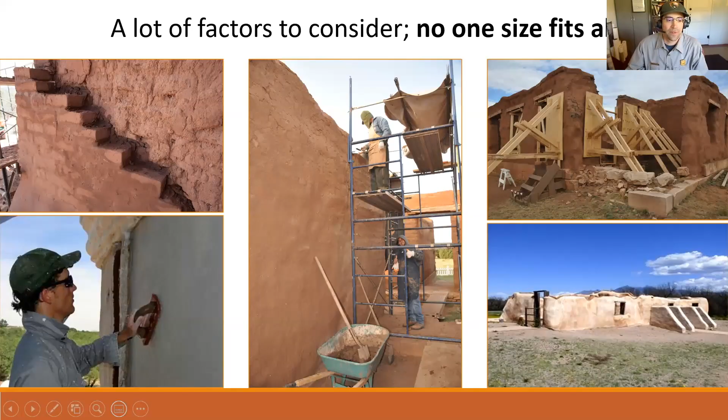However, there's a large range of things that must be considered when thinking about how to choose treatments. Oftentimes, these factors relate to site history and significance. So again, we want to make sure that treatments that are planned or executed are in keeping with the history and significance of the site and still allow us to tell the story.

We also have to consider National Historic Preservation Act and compliance with Section 106 and National Register character defining features. Often this requires SHPO consultation. Whenever planning a treatment, you really need to be in contact with the State Historic Preservation Office if you're considering treatments on eligible sites that are eligible for the National Register or are already listed. Consultation with SHPO can really be an effective way to develop treatments that are sensitive to the resource and consider character defining features. Integrity is an important concept to consider when planning for treatments.

These include materials, workmanship, feel, and setting. Interpretive goals and parks or resources, fundamental resources and values, or a site's fundamental resources and values are important things to consider as well. Oftentimes, many of the treatment decisions that are made have to do with interpretive goals and the way the site is meant to be presented to the public or to visitors in order to tell a story that's fundamental to that site or that park or resource.

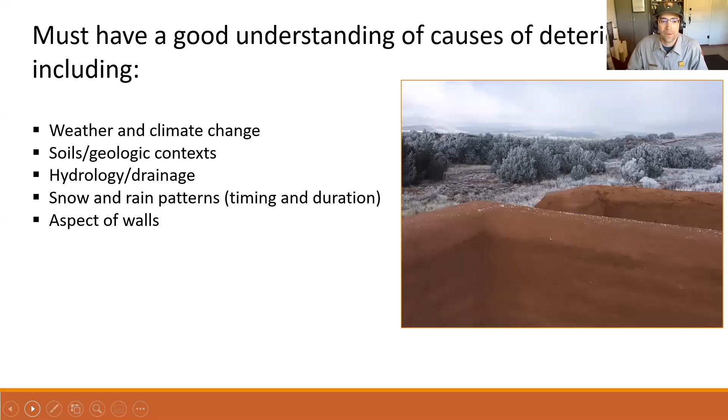Local soils and geologic contexts need to be understood for how erosion may affect a site and drainage patterns. Local hydrology, how close is bedrock, and how water drains from or approaches the site are important considerations, along with snow and rain patterns and aspects of walls. It's pretty common to look at the north side or north walls, and east walls often get more impact from moisture. Moisture is really the number one cause of deterioration of earthen architecture. So much of what we'll be talking about today, and in the case studies presented, has to do with dealing with the effects of improper drainage and impacts from moisture intrusion and the instability it may cause.

Preservation documentation needs to be considered whenever planning treatments. At a minimum, before, during, and after photos need to be taken to document the treatments. Documentation is really important if we're going to learn from our past failures and learn the successes of our treatments, and show them to others.

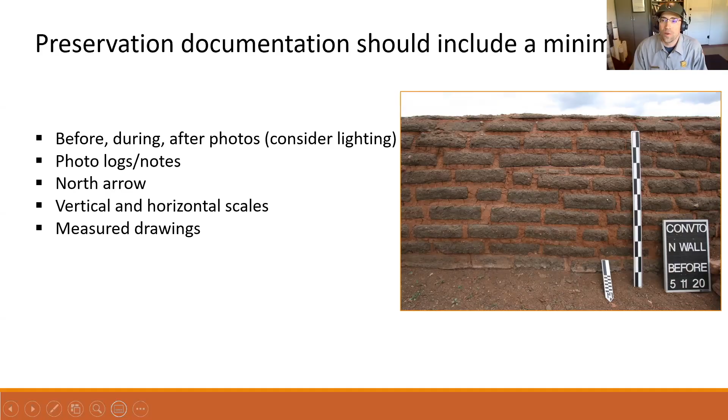Lighting needs to be considered during photos, so you often need to go out when the light's even, and a little cloudy is usually the best time. North-facing walls will be more difficult to photograph. Photo logs, notes, north arrows, vertical and horizontal scales, and measured drawings are crucial.

Next, I'm going to show you one method of how Pecos National Historical Park protects original 17th and 18th century adobe walls. As I said, many parks and sites use different methods, and although they follow the basic principles we went over, some of that is based on the history of treatments on the site. At Pecos, the use of brick veneers to protect original walls, and to protect and provide the form and outline of deteriorated Spanish colonial walls of the church and convento, started in 1915.

Since then, we've been honing that technique. Now I'm going to show you a series of photos, including an animation at the end, that shows how we do this method or technique.

Here we're seeing the way we do it at Pecos: we encapsulate the original material, the original adobe wall remnants, in a new brick veneer. We make the bricks on site, so it is a form of encapsulation or shelter coating, but in this case we're using actual adobe bricks. We don't plaster over the bricks typically, and that's related to the interpretive values that seeing adobe brick gives you. This was a decision that goes back quite a ways, and we really want the public to come away with an understanding of the construction of the site.

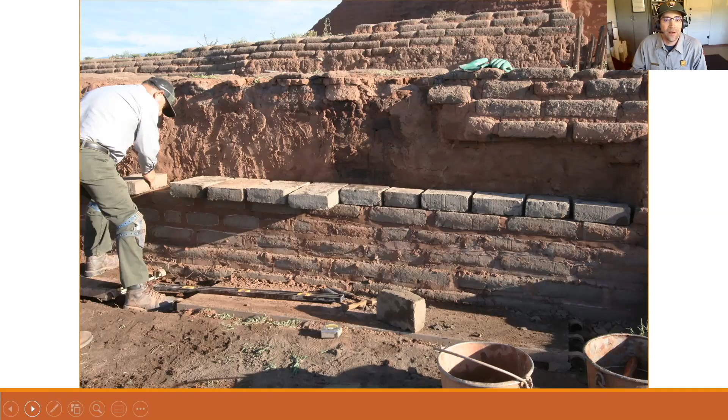Then we build the new veneer from the base up with bricks we make on site. Here's Mason Jerry Garza laying the bricks against the original. We're doing one side at a time, so just one side of the veneer, while the original is protected behind the unamended shelter coat. Once we build the veneer all the way up, we also work on the cap.

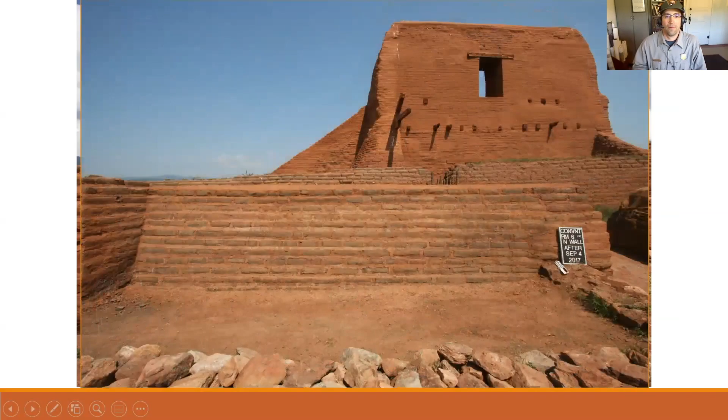Here's an animation to show before and after. Magic.

I hope you got an idea today of the basic principles and factors to consider when planning any treatments or preservation work on earthen architecture. I hope we've made the selection of those factors a little clearer, and I hope you'll be able to come visit us at Pecos National Historical Park someday. It's a pleasure being with you today. Thank you.

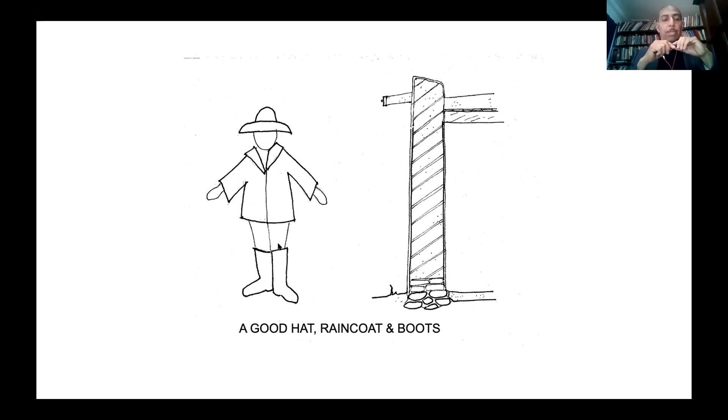It is important to note the variety of protections needed for building walls and other elements, such as what this sketch shows: a good hat, raincoat, and good high boots. This does not mean we will make everything impervious, but instead whatever we select as materials will be compatible and sacrificial before the substrate material is affected. Maintenance is part of the nature of these earthen buildings, and you will continue to hear that today and in the following weeks.

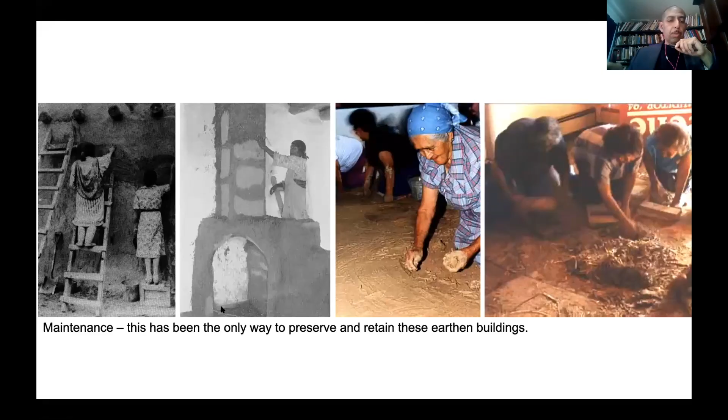Another intangible aspect of the annual care and cyclical maintenance of these buildings takes place in the Hispano village communities. These series of photos show a living tradition that we are in danger of losing. A key component to these buildings are the mayordomos.

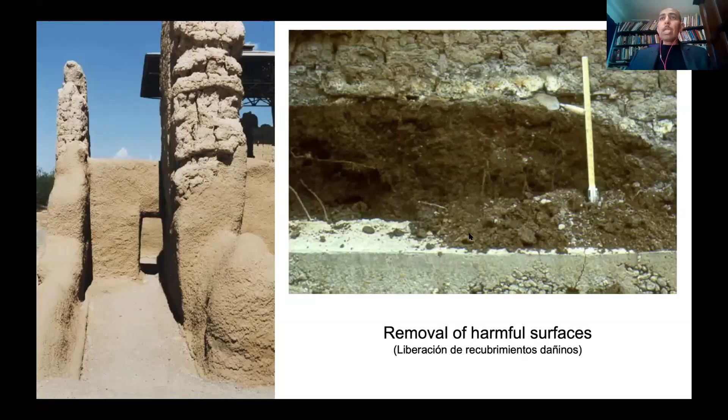You can see the art conservators repairing or injecting mixtures of clay with a bit of lime, in some cases to reintegrate earth reliefs or pieces of decorated or polychromatic surfaces.

The rajueleo system uses small pieces of volcanic or lava rock, broken ceramics, lighter stones, and other available materials for chinking the mortar joints in stone masonry as well as adobe walls. It might not be easy to do in an earth mortar masonry structure in our region, but it could be tried or modified to fit our needs here.

What about our shoring needs? When it comes to fragile and failing walls, it's vastly important to shore up walls or structures if they're close to collapse, or if visitors are getting too close to them. The shoring system should be architecturally and aesthetically pleasing, fitting into the context of the site, landscape, and the materiality of the structure or building.

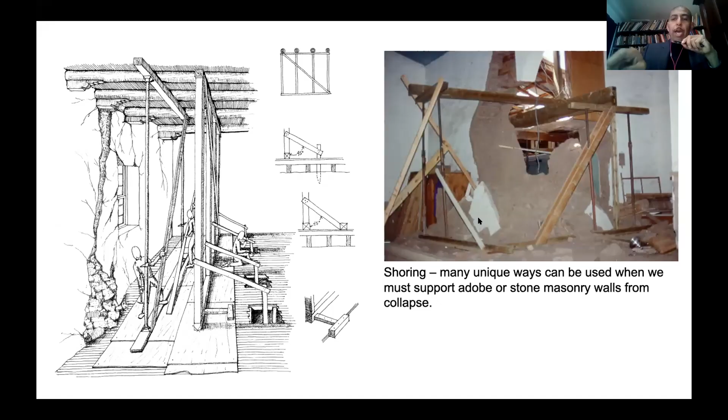The other slide shows the Oratorio Jesús Nazareno in the community of La Jara, where a lack of good drainage caused these walls to fail. The walls were constructed in a very unique encofrado manner, or boxed-in walls, which they call paredes de cajón.

Mud and rocks are laid in wood forms similar to rammed earth, then the formwork is removed. The only way to repair this building was to extend a temporary beam from the interior to the exterior, in order to allow us to work around the structure and near the wall.

The next seven slides will depict the effects of adding concrete against a wall, and the careful removal and repair of the base of the walls. We start with a quick diagram showing what to expect in a wall when carefully removing a concrete apron.

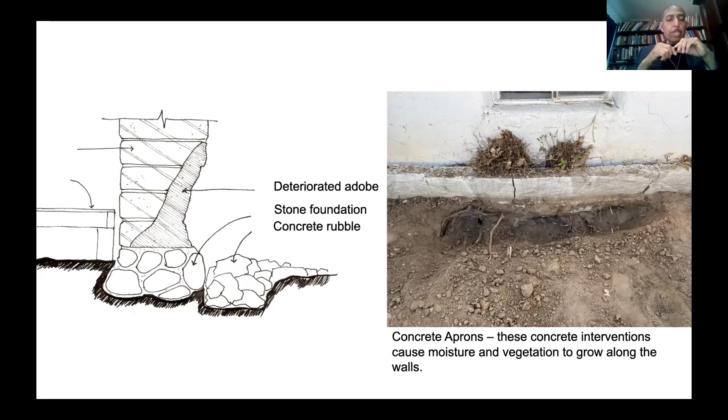In some cases, like the slide shows, vegetation growing between the concrete apron and the wall can also be an issue. This photo was taken a few days ago in a small adobe structure in the village of Los Lunas.

The following slide shows a temporary shoring system composed of plywood, through-bolted and supported with diagonal wood members to prevent kickback. This photo was taken at the historic Gutierrez Hubbell House in Albuquerque.

It's a long story, but we had to work quite fast since someone had kicked in the lower part of the wall. The good thing with this wall is that we had previously shored it, so it didn't collapse on us.

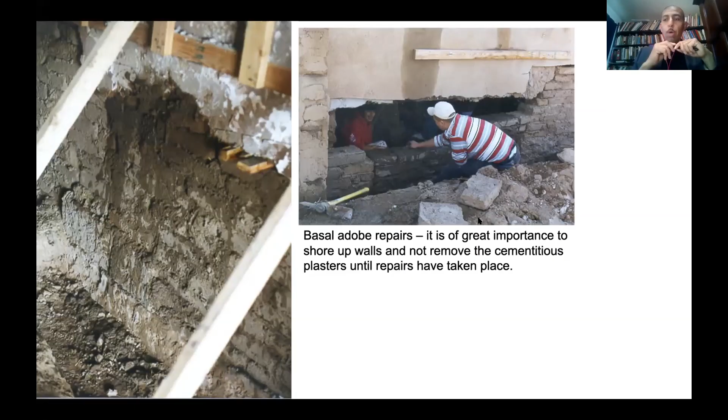These two images of the Arroyo Hondo Church show the insertion of adobes along the base after a very large concrete apron with rebar had been carefully removed.

While working with Cornerstones Community Partnerships, we were recommended a product called Bristar back in the day, but now you can find it under the name Betonamit. You create holes in the concrete, then pour this miracle material, and it slowly breaks and cracks the concrete into smaller pieces. Please do not use pneumatic tools against these fragile walls.

It is key to make a good connection with unamended adobes in order to have good adhesion to the wall. Once again, you see a slide of Arroyo Hondo to the right and a slide of the church in the town of Bernalillo, which we discussed earlier in the shoring part.

I will not get into how to do this, but there are times that if a certain percentage of wall is deteriorated, you then take certain actions. In some cases, you might need to have new adobes keyed into the original wall, but in some cases, the use of mud plastering layers with light stones or other light material could work just as well.

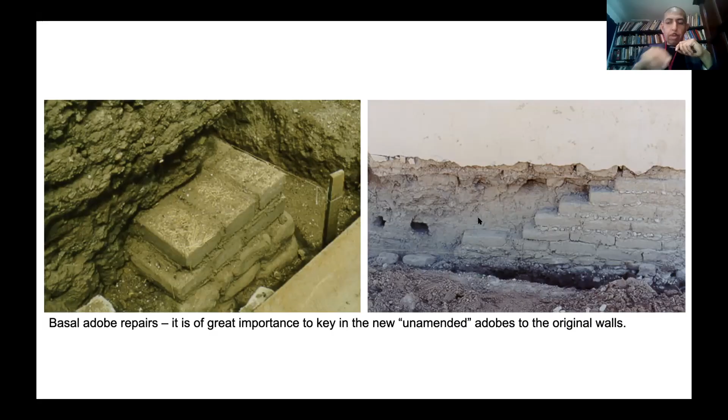This next slide, which took place at the Gutierrez Hubbell House in Albuquerque, shows this young man laying adobes and allowing them to dry before hard packing the top of the new adobes with the original wall using dry mud. This is done to prevent shrinkage and separation of new adobes from the original wall, making this a more monolithic wall.

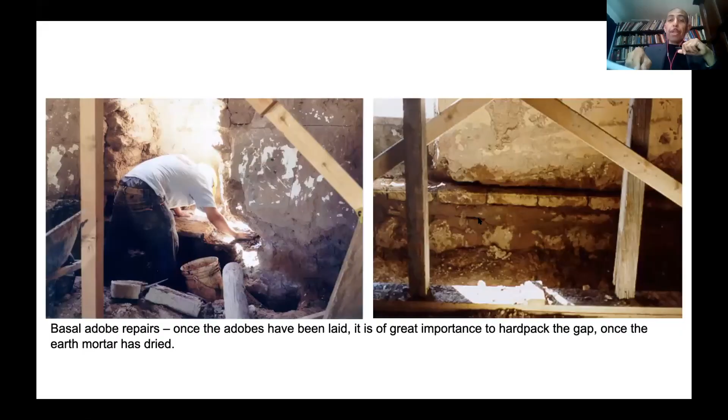The next two slides show through sketches what a wall should look like when repairing the base with new unamended adobes. Remember, it is important not to remove the cementitious plaster, especially since in most cases these plasters can become a structural diaphragm, and its removal should only take place at intervals a few feet apart.

This allows the walls to dry, and like I mentioned before, it retains the rest of the adobe wall in place. Notice the keys, which are important when working on specific areas of the wall. These eventually will serve to connect all the repairs and make it into a continuous adobe coursing at the base of the wall.

The last slide shows how it should look after the repairs have taken place along the walls. Observe how well crafted Pat Taylor and his crew repaired this wall at the Socorro Mission in the city of Socorro near El Paso, Texas.

And a quick sectional diagram showing you how to key in the adobes while working on the basal repairs.

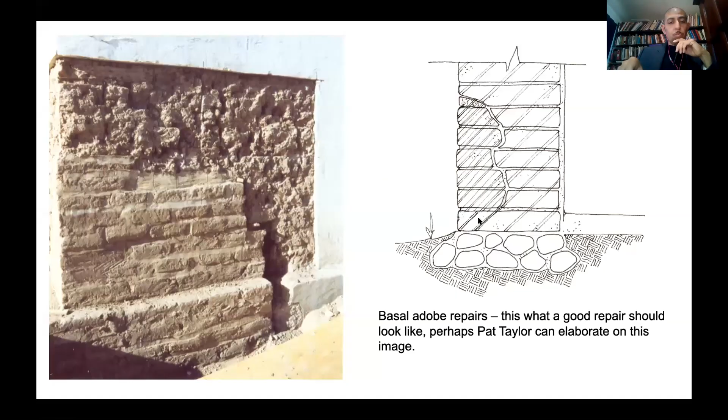Many of these adobe repairs are tedious, such as this example at the Gutierrez Hubbell House site where we worked with a local group of young men. The slide is depicting the lack of good connection at the corner of this building, the Casa Hubbell.

It was not structurally failing, so we decided to stitch the walls with adobe in situ, or adobes that were actually made in situ. In this case, we carefully removed the half piece adobes in order to insert a full one. We jumped from the lower area of the wall to the top and so on until we were able to complete all repairs. Notice the similar shoring that you saw in the previous slides in the same house.

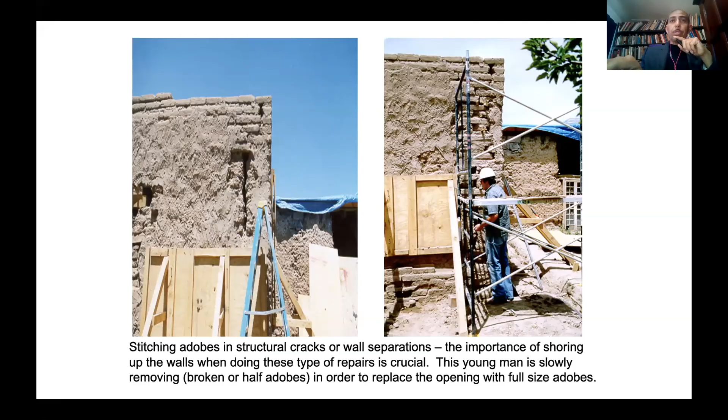Let's quickly touch on mud plastering. There are different ways of applying mud plasters onto the adobe or stone masonry walls when plastering a wall or site. I prefer to throw the first coat onto the masonry or earth walls. It is not commonly used in the States, but it's a common practice with our neighbors to the south.

The albañiles, or masons, have been doing this for centuries, and it is common to apply the coats of plaster in this fashion, especially since they typically don't use wire lath for their contemporary construction practices. It takes time and practice, but it can easily be mastered, and can move along quite fast once you get used to it.

It is sometimes difficult to find good soils used in some of these sites, especially when the parks do not allow it.

Let's quickly touch on mud plastering. There are different ways of applying mud plasters onto masonry walls, but I've already gone through that.

It is sometimes difficult to find similar soil used on some of these sites, especially when parks do not allow the collection of on-site earth materials to make adobes or repairs. It becomes a difficult task, especially if you don't have local community members who still know the knowledge for seeking good soil deposits within that area. I suggest experimenting with the soil and creating a variety of test panels to obtain an appropriate mix, especially if you are thinking of mud plastering your site or monument. You could even explore or utilize a very small percentage of lime in your mix.

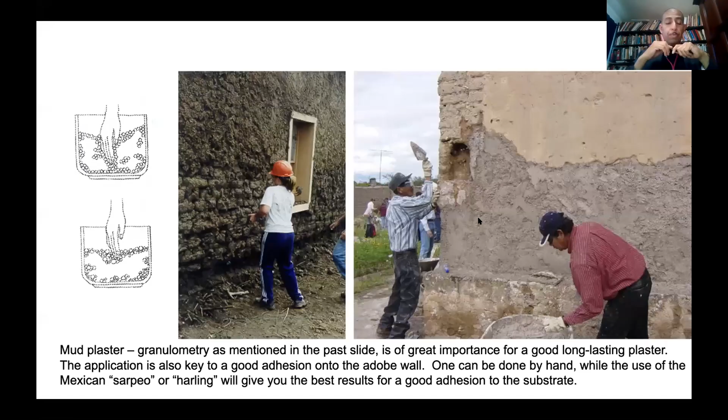In this slide you can see two methods of application, but the diagram to the left is an experiment you can try at home. Place one size marble into a container and stick your hand through to touch the bottom. Now take the same container and add a variety of different size marbles, beans, beads, and other angular elements. You will see that the hand does not go through. This demonstrates how different size particles connect and make their way like a puzzle, making a really tight fit. This shows how good distribution in the granulometry of your sand or gravel can improve your mix. Of course, the final coat can be applied with a trowel over a rough or scratch first coat of plaster.

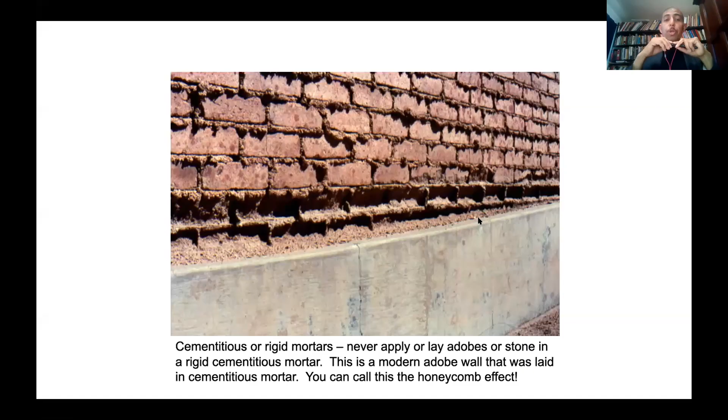Very quickly, two points. One, never utilize a hard mortar to lay adobes or stone masonry. The softer material, such as the adobe or stone, will deteriorate faster and cause what we actually see as the honeycomb effect, like shown in this slide. Even this wall that was recently built, you can imagine what it would do to an older adobe wall, which we constantly deal with in our line of work.

Capping is very necessary to do right, most of you know this already. Do not apply hard or more rigid materials to the top of the walls. It is of great importance to keep the soil or material composition as compatible as possible, like Jeremy mentioned earlier. This might take a bit of time to come up with different mixes with a good amount of straw and large angular gravel, and if possible, a very small percentage of lime in your mix.

Remember, straw is a material brought in by the early colonizers. Adobe is a masonry unit utilized by early colonizers, however the use of adobe already existed in the New World and in this region. The use of adobe was just taking off and had not been extensively used, at least in this region. Most of the early adobes found in this region were hand molded with lots of grass, not straw, remember, no straw, that was a European product.

One thing to remember, especially for our archaeologist friends: not because it is earth is it considered adobe. Once again, it's not the material, but instead it is a masonry unit that can come in different sizes and forms.

Going back to inappropriate methods for drainage and incompatibility of materials, such as cementitious plasters. This example of La Iglesia de San Jose in Rociada Arriba in northern New Mexico shows that after many years of a lack of good drainage, and allowing exterior soil to accumulate beyond the original grade, issues can occur to the building, plus let us not forget the cementitious plasters applied to the exterior walls. Notice the person digging, he is now standing at the original grade of the church, along the exterior wall. The next couple of slides will show a quick diagram of how the wall gets intervened with man-made and impervious materials, and the effects of it through time.

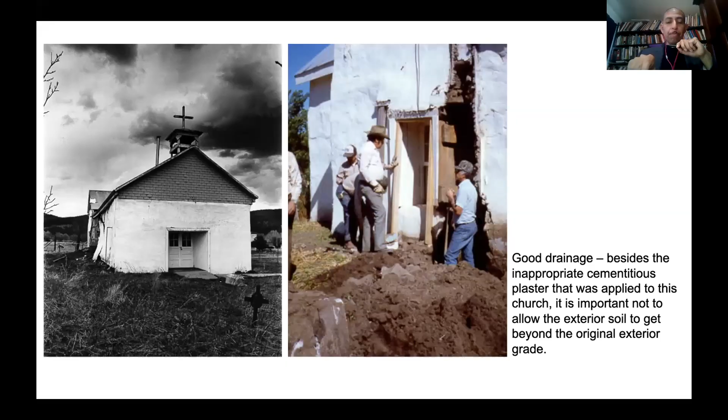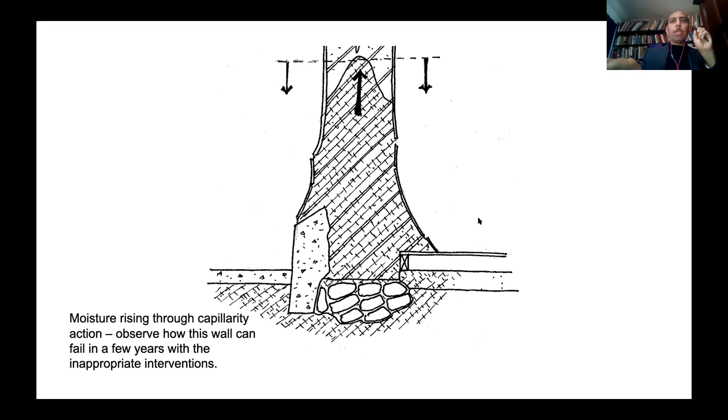This is like when moisture keeps rising, and we keep putting impervious surfaces onto it, a concrete slab, and then a concrete apron, that eventually will retain the moisture and weaken the base of the wall.

This shows, and I'll go through it quickly, but I wanted to show you the drawings for this particular building, San Esteban del Rey mission in the Acoma Pueblo. We can see Pat Taylor and Antonio Guerrero, our colleague from INAH, he's an architect and specialist in earthen restoration. These are the evolution of the drawings we proposed for the clerestory window.

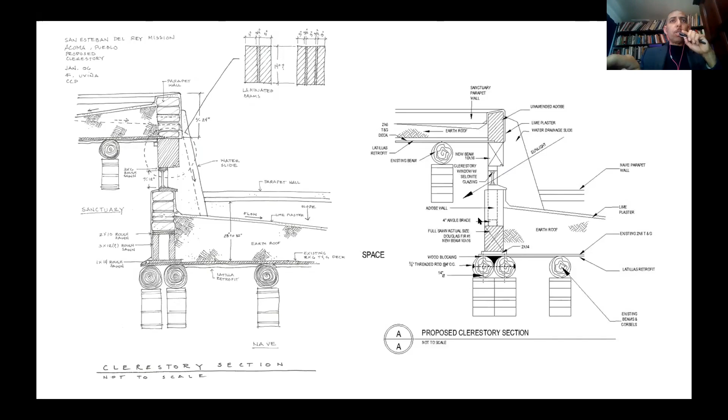And once the engineer gets hold of it, we start to improve it and eventually make it into an AutoCAD drawing. Jeremy did mention this, documentation is very important when it comes to these buildings.

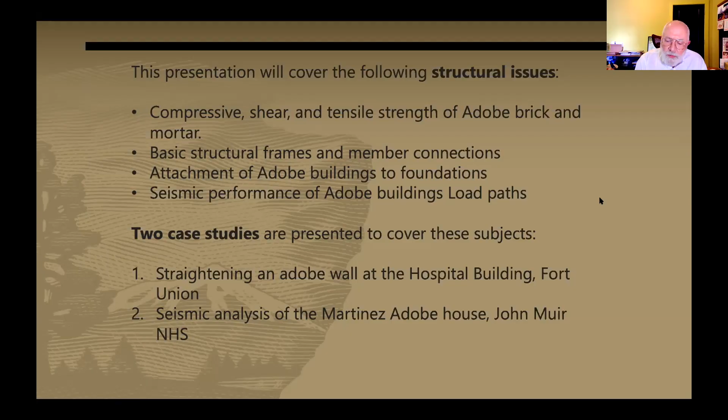The Fort Union site was built during the Civil War, and it was the distribution point for supplies to the Western United States.

The fort was developed in 3 phases. The first phase were earthen structures. Then they moved over to the second fort, and this fort was abandoned because there was this large mesa hillside where the Confederate armies could attack the Union armies at the second fort. So then they moved it out into the middle of this plain, immediately adjacent to the old Santa Fe Trail.

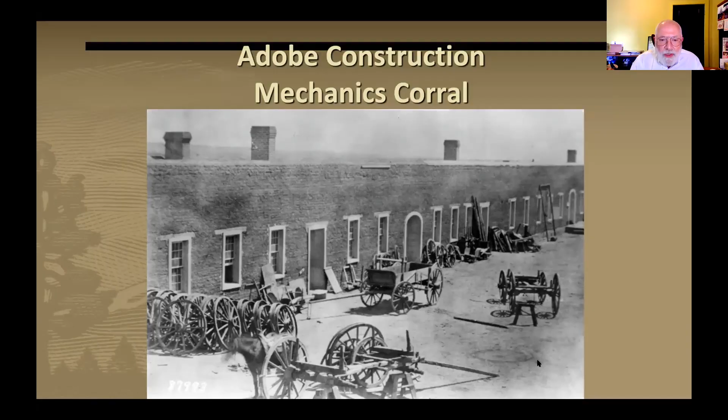The construction methods in certain areas, they would use adobe, and then it would not be covered for weather protection. It would come down immediately to a stone foundation created by having an outer wythe of stone and then a rubble infill in between, with the adobe wall built on top of that.

The building I'm going to talk about today is the hospital building. This building has adobe walls with flat timber planks that covered the adobe for weather protection. It was a fairly large structure, multiple structures that were linked together on site.

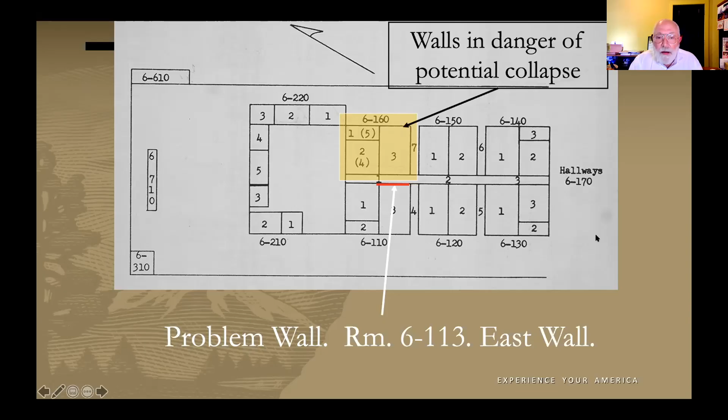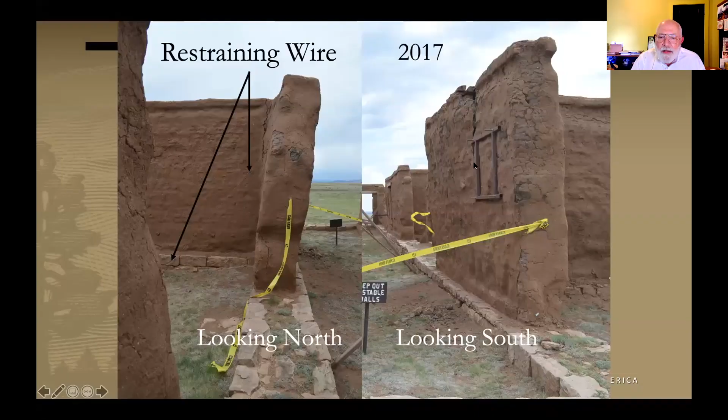So I went back and started to lay this out and do some calculations on the structure, on the wall, and looked at methods of actually doing something, such as taking it down fully and reconstructing it.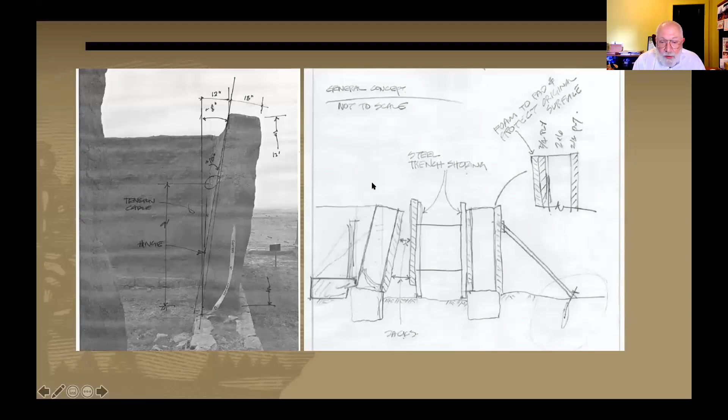You can see that this wall was rotated about 8 degrees, that's 18 inches in 12 feet of wall height. It's a fairly thick wall. By calculation, it was going to take 4 20-ton jacks to apply the initial force to push that wall back up straight.

Here, we're looking at the wall right here. This is the frame that we would push the wall against, and this was aligned to be plumb vertical, so that would tell me when the wall would be up straight. You can also see the condition of the foundations. As I was mentioning, there's exterior wythe, stone wythe, and then rubble infill.

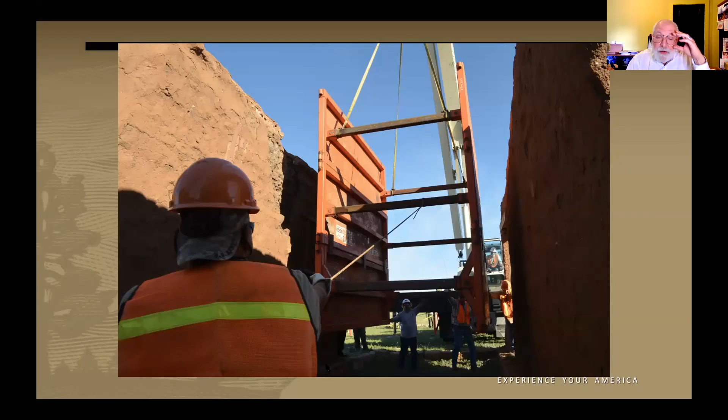Here we are moving this trenching shoring. This is used in common urban environments, and it's a rigid system. We brought in a crane to lift it in, and then on the left side you can see we put the frame in place.

You can see how out of plumb this wall is. Again, this is a vertical line, so you get an idea of how out of plumb it is.

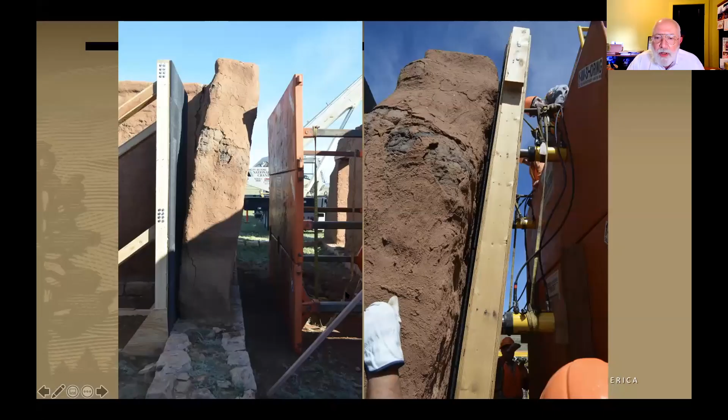Then we dropped in these panels, which were strengthened to take these point loads. These are four 20-ton jacks that we ran off to a single manifold, and we could manipulate each of those jacks individually.

Once we pushed up and got the load onto the wall, we then came in and had to clean out all the cracks of the prior mortar that was placed in those cracks.

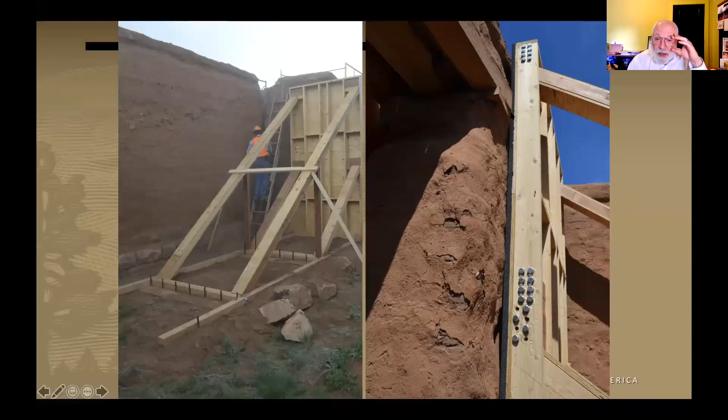The view on the right here shows that there was load coming in. This is on the back side of that wall, and you can see how some of the foam has collapsed. That's a structural foam where you can dial in the compressive strength.

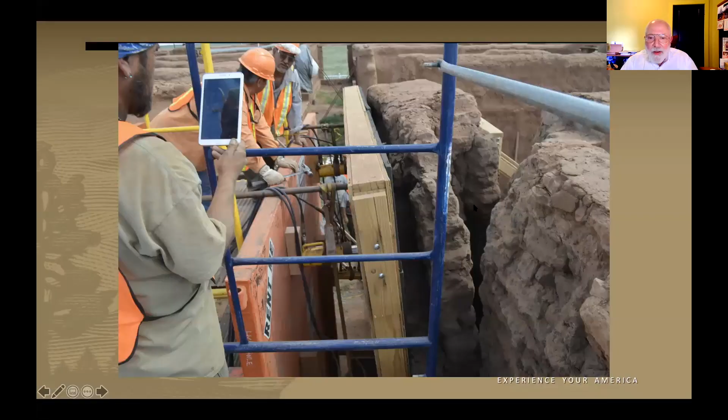And here we are in the process of pushing the wall back in. Once everything was cleaned out, we had to dig down and clean out this joint and push it back into place.

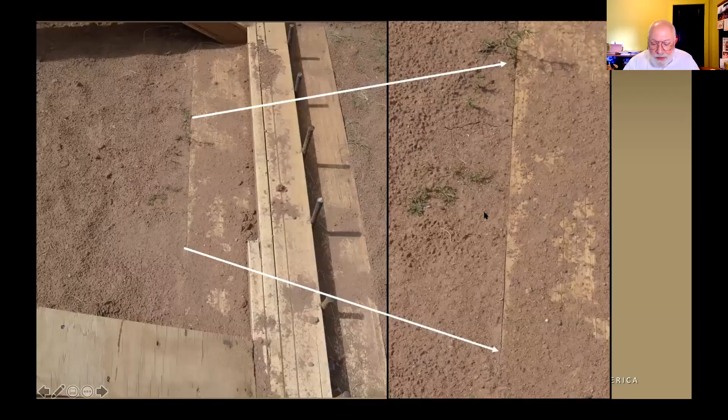And here we are with the wall in place. This slide shows the reaction side, and it shows there was movement, which means this reaction frame was actually taking load.

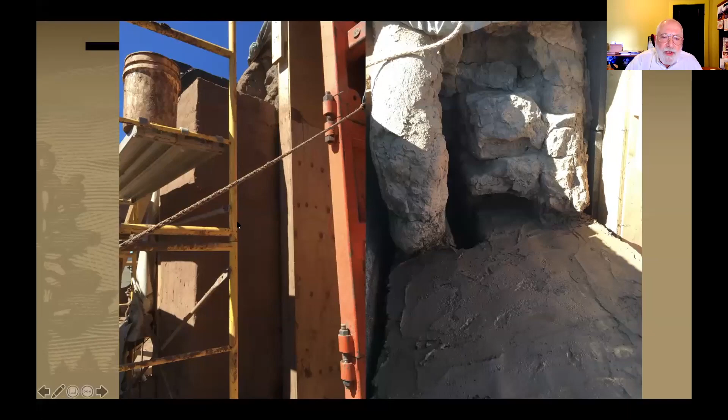At the end of the project, at the end of the straightening, they went over and built an end column pillar and keyed that into the end of the wall.

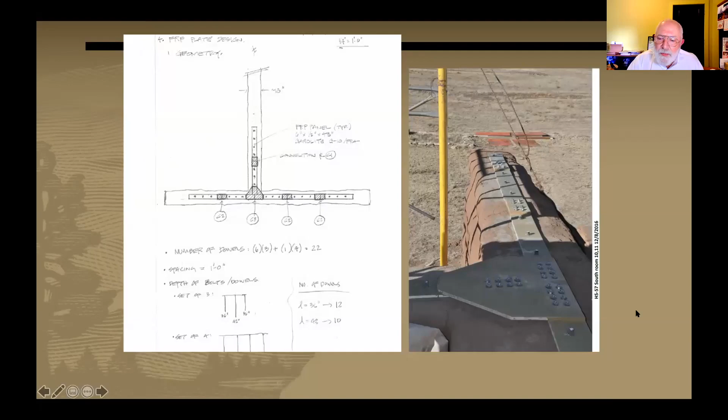Because this wall was exposed to high winds out on that huge plain, I designed in a T brace that would go on top of the frame—it's a fiberglass T frame. We used drill and bond to insert anchors down into the wall at special positions to take the lateral wind loads coming onto the wall.

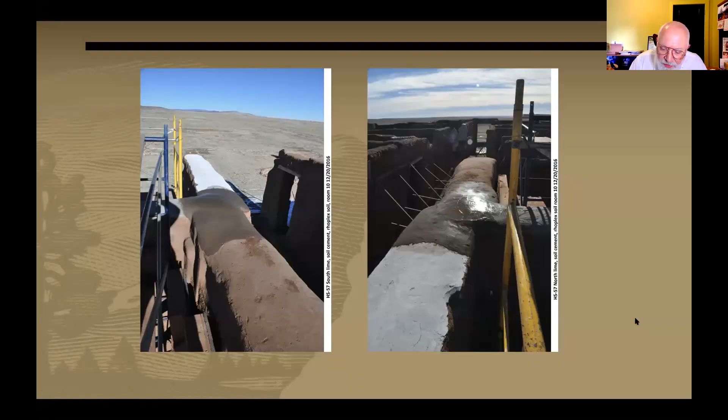Another view of that. Because this was a test section, we tested various mortar caps: natural hydraulic lime, an amended mortar, a pure earthen mortar, and also some cementitious grout. And here's the wall in place.

The next subject I want to cover is the condition assessment of the Martinez adobe. Quickly, the Martinez adobe was awarded to Senor Martinez, who was part of the Mexican Army back in the early 1800s when they occupied California. He was granted over 17,000 acres of land.

Long story short, it ultimately went to Dr. Strenzel, a German who came to the United States. John Muir married Dr. Strenzel's daughter, and then Muir moved to the property, so it's known as the John Muir house. Here's the John Muir house—that was Strenzel's original house, a Victorian era structure. And here's the Martinez adobe.

Here's a view of the home, taken back in the early 60s. It's at the base of the hill. The structure went through several changes over time, and you can see some of this in terms of a lean-to shed and a cistern.

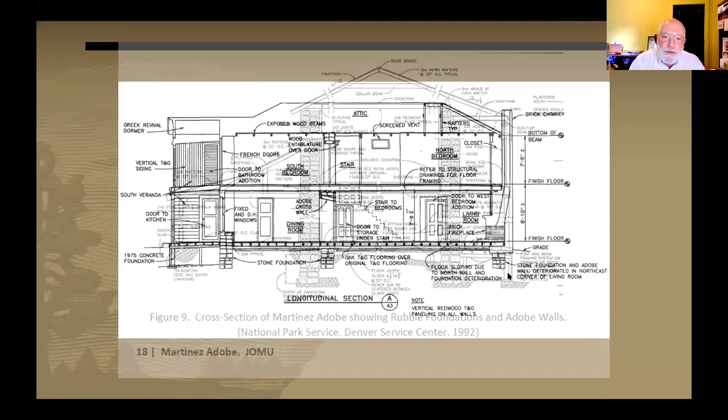So here was the structure in 2017. What I want to point out is that this building has adobe walls, plank clapboards over the exterior, and a rubble foundation. So this system is really just sitting on a pile of rocks.

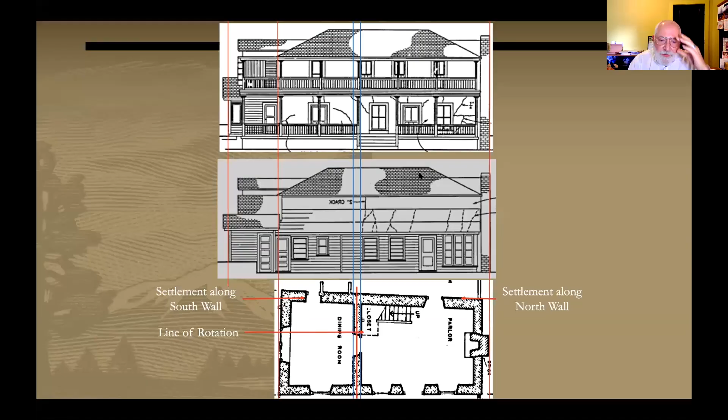I went in and was asked to originally look at some crack patterns in the system and some of the settlement. But once I started really looking into this, I realized that some work done in the early 1990s for seismic retrofit wasn't adequate. So that's what I want to talk about.

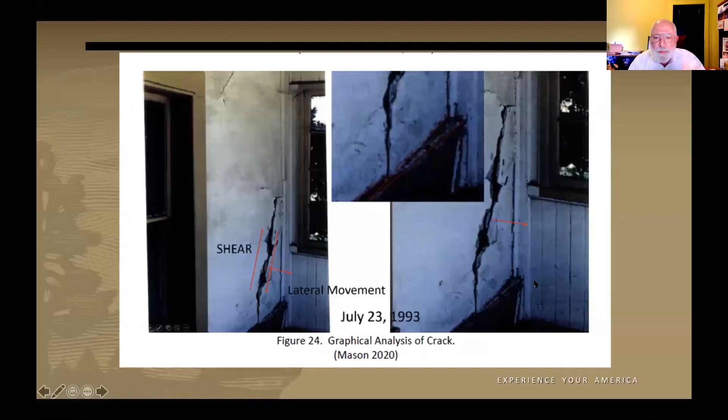The cracks in the wall show me movement. This wall in particular had two kinds of movement going on. This shows the settlement of the chimney, and here are the cracks in the wall. What's happening is we have both shear loading and lateral loading. It took a little bit of thinking about why we have these two different actions at this one place. I'll show you the details of that in a minute.

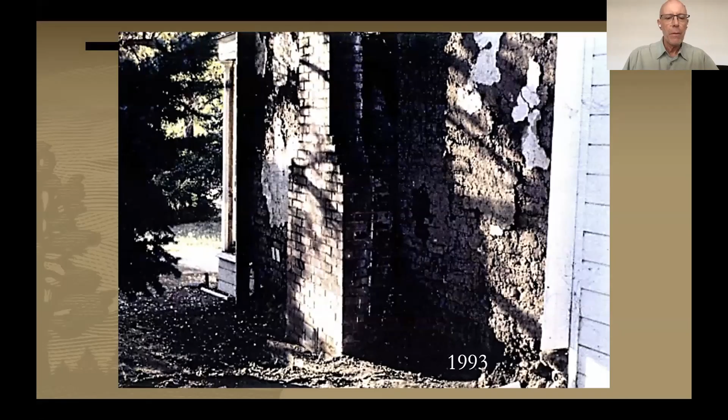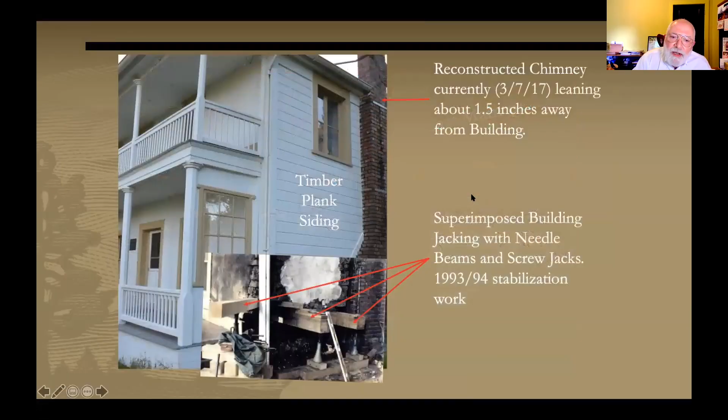In 1993, they went in and started working on this structure. They put in some what are called needle beams. I highly suggest you understand the compressive strength of your adobe before you start jacking it. They caused problems with those needle beams, and they thought they were encasing the foundation. That did not happen. So here's a superposition of the work.

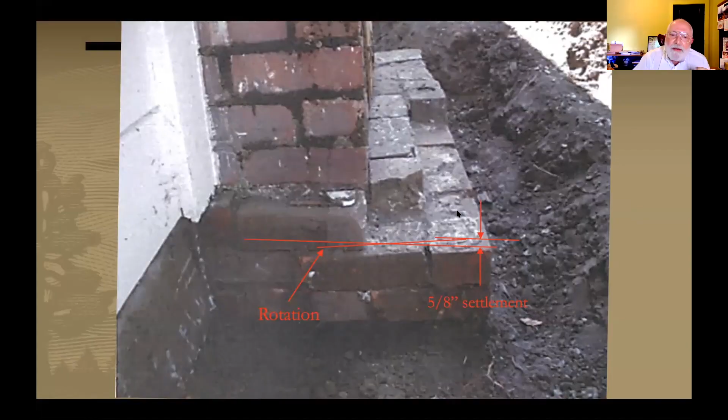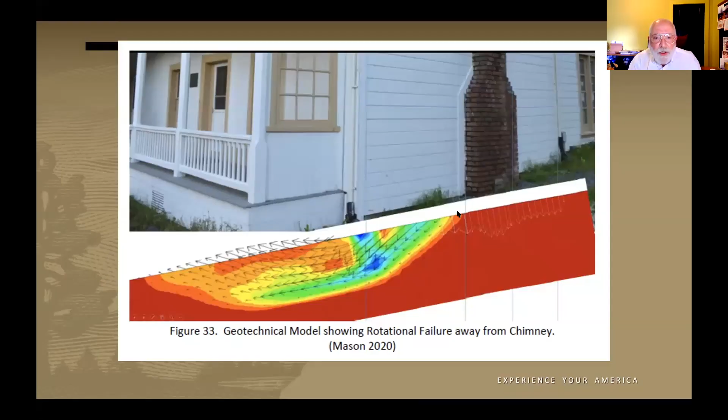You can also look at trees as sucking moisture away from your structure, causing settlement. Here's the actual settlement measured back in 1993. You can calculate that the chimney was leaning, and I could put numbers to this to justify understanding the leaning of the wall. I also did geotechnical analysis showing there was actually a slip failure occurring underneath that end of the wall, which was forcing that lateral movement.

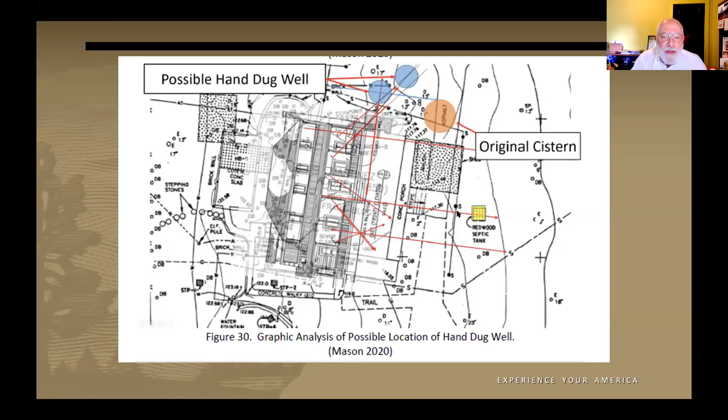I also looked at the outer movement and came up with the fact that there were 2 hand-dug wells, mentioned in an HSR, Historic Structures Report. I modeled the well and showed there was movement equivalent to what I was measuring in the field.

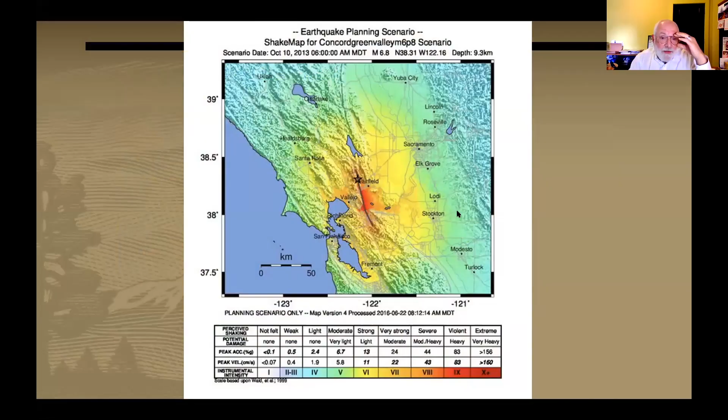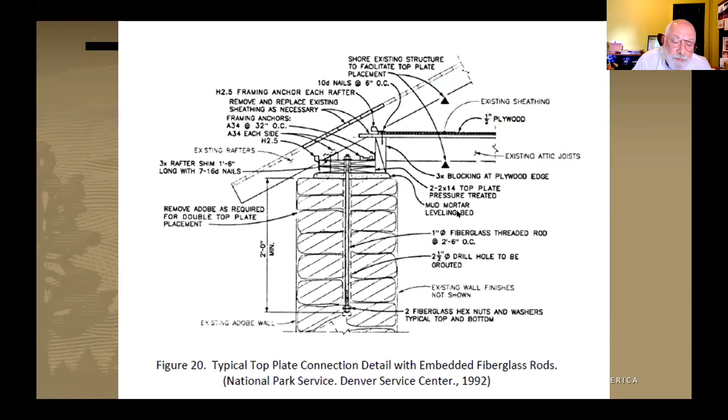Then comes the earthquake part of this story. This structure survived the 1906 earthquake, but if it gets hit by the earthquake on the Concord-Green Valley Fault, it lacks all the detail needed to sustain that load, and it would literally fall over. These are details that were drawn back in 1992, but were not implemented.

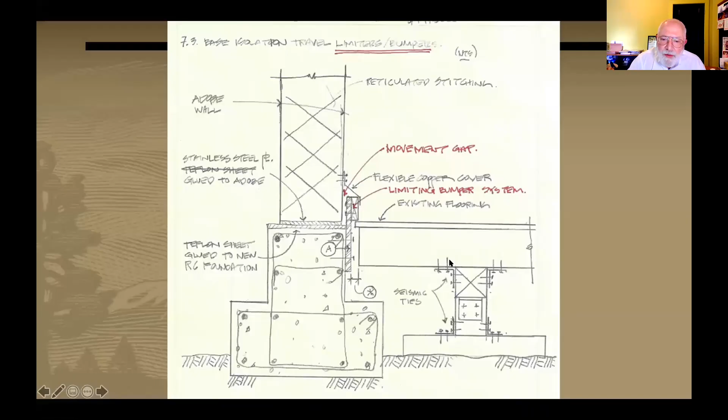Lastly, I looked at 2 different methods of trying to keep the structure together, and I came up with what's called a base isolation system, where literally we're going to jack the building up, build a new foundation underneath, and put in these plates. It's a stainless steel and Teflon plate between the original structure. We'd stitch together the walls and put in a wall system, and the first floor system would be a free floating system within the wall section itself.

And you could do the same with the chimney. Here I'm showing stitching patterns you would need to hold the wall together once it was all put up on the base isolation.

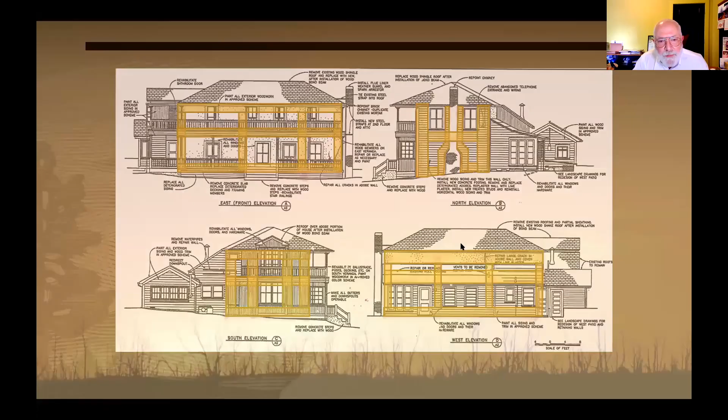Okay, thank you. Thank you, James. I think we could do a whole session on earthquake and seismic. It's a huge topic. Yeah.

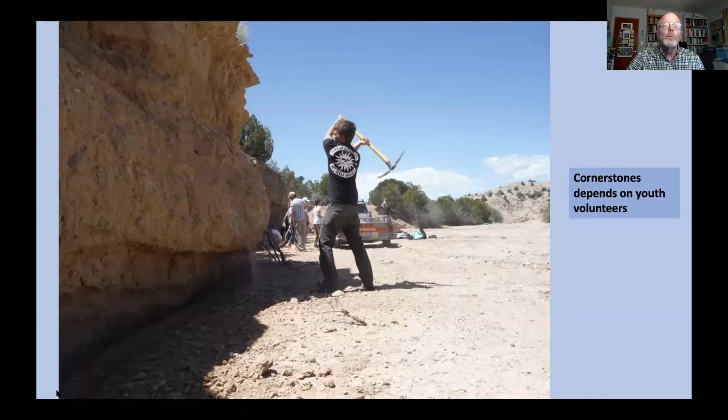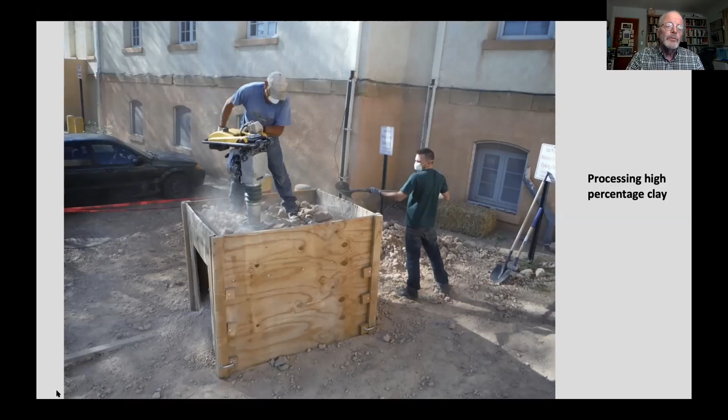Materials like those require extra processing. Those pieces of a solid clay bank come down as rocks, and they have to be broken up into a sandy or much finer aggregate to be mixed into the adobe products.

In our work, one of our first goals is to make adobes usually on site. We find that in all of our projects we need adobes, and so one of our first procedures is to make a good adobe that can be used in the repair of the buildings coming up.

This is about a 30-day process, so we need to plan ahead. It's not possible to show up at the job site ready to work without having some adobes on hand, so we do this ahead of time. Each season we typically make adobes at the beginning of the season and stockpile them for our work.

One thing we have found is that adobe making is very popular for volunteers, and we can usually attract volunteers both locally and from other places to join in the adobe making process.

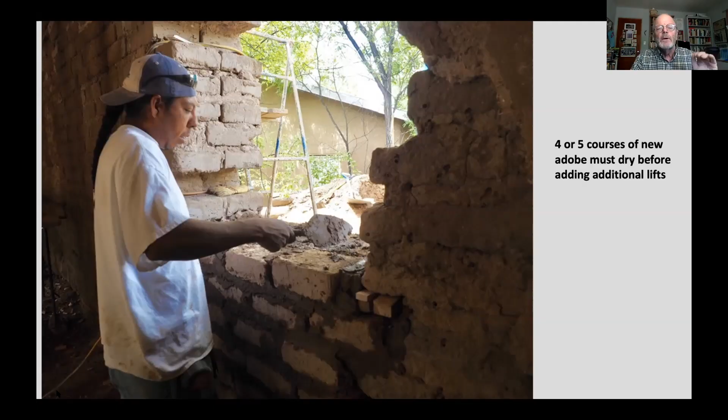Francisco covered this very well. Stitching and building in adobe, we're using the same material for the mortar as we use in the bricks. This is all unamended work that we do. Going up in courses, you have to be careful that those courses, four or five courses at the maximum, are fully dried, so that you prevent settling before you go up with a new course.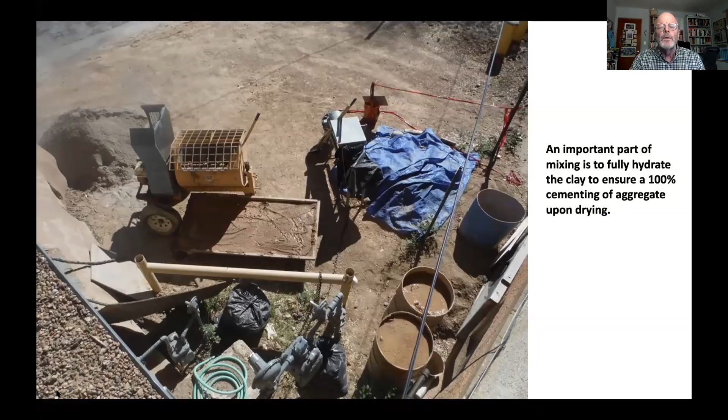We use unamended earthen materials for earthen plaster on all of our projects. What we have found is that if we're very careful with materials and very careful with application, the vertical surfaces can be very durable. In some cases we have vertical surfaces over 10 years old exposed to the weather, and they're doing quite well.

With buildings that have parapets or untreated caps, like the examples we saw in Jeremy's and Francisco's examples, and also at Fort Union, the cap will weather much more aggressively. So in our case, we like to have a maintenance process going on to maintain those caps on such buildings.

In 2012, Cornerstones joined the Desert Southwest Cooperative Ecosystem Studies Unit for the purpose of participating on public lands with the National Park Service and Bureau of Land Management to conduct workshops in the preservation of traditional building technologies. For the Desert Southwest Cooperative, these CESUs around the United States are all set up more or less the same.

It's a very important and interesting process of value to the federal government, all federal government agencies. It's a place where we all can meet together in a sort of figurative roundtable, nonprofits and government agencies, to sort out problems and find solutions, to put on trainings and do pilot projects to solve these problems.

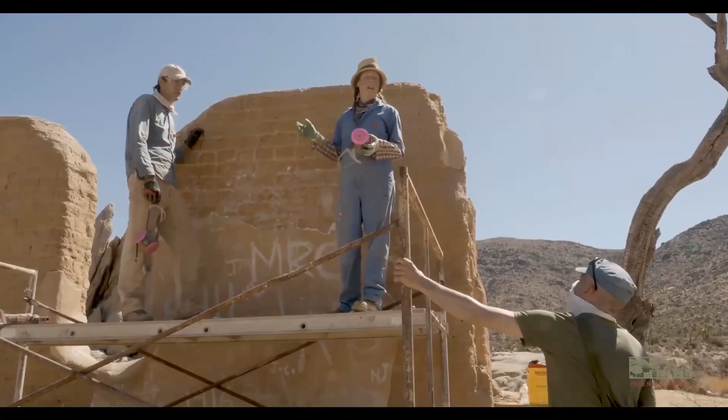It's impossible for the park to have all that expertise in-house to deal with managing all these different types of historic structures. So our partnership with Cornerstones provides a really valuable opportunity for the park to bring in subject matter experts who understand adobe preservation, adobe stabilization, and the care and maintenance of adobe structures, very specifically.

This partnership allows us to bring in those experts to partner with park staff and provide training to park staff on how to do this work, how to care for them. It also provides training and educational opportunities for the public, allowing volunteers to come in and take part in hands-on preservation work, maintaining, stabilizing, and preserving these really important and unique historic structures.

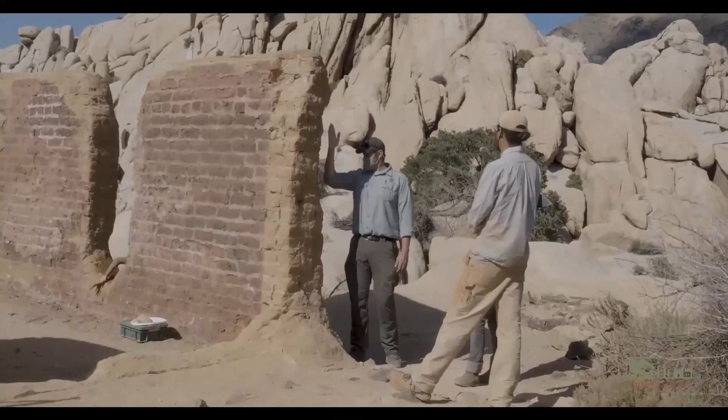We have a structure like Ryan Ranch where the nature of the work itself is cyclic and requires multiple years to complete, to do a preliminary test, to see how that test works, to assess the efficacy of our treatments, to apply a full treatment, and then to apply a retreatment. Having a partner like Cornerstones who has the ability to stretch a project out over the appropriate lifespan for that project becomes an invaluable resource for the agency.

Hi, my name is Isaac Logston. I work with Cornerstones Community Partnerships. We're here at Ryan Ranch at Joshua Tree National Park. Also on this project is Angela Francis, who's the lead plasterer.

We began at this site by removing the failing lime plaster that's been here for about a decade. Big sections have been delaminating and falling off throughout the site. A lot of this is just carefully removing the lime plaster that was put on as a sacrificial coat, and general site cleanup.

In addition to removing the sacrificial lime plaster, we're also trying to stabilize the edges of some of the original plasters. These were interior lime plasters that we suspect were done in the 1890s when the structure was built. In order to save these sections of interior plaster, we took away some of it until we could find stable edges, and then we stabilized them further using a natural hydraulic lime, or NHL 3.5.

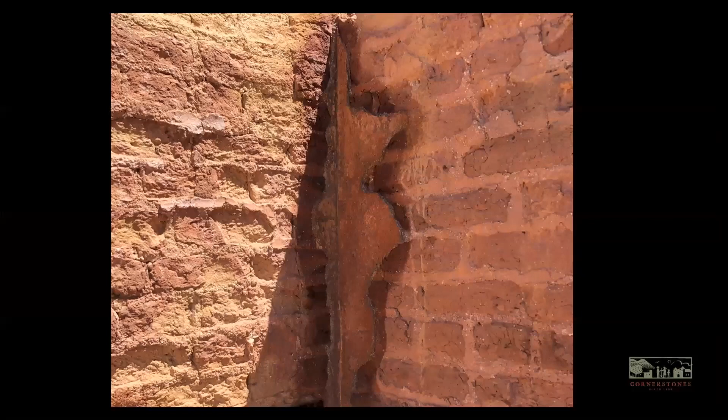We brushed down the edges to clear them of debris and remixed the NHL with finely sifted sand. This stabilizes the edges, and it also creates a place for us to meet those interior sections with the earthen plaster that we're applying. A lot of this project is also just hauling materials to and from the site.

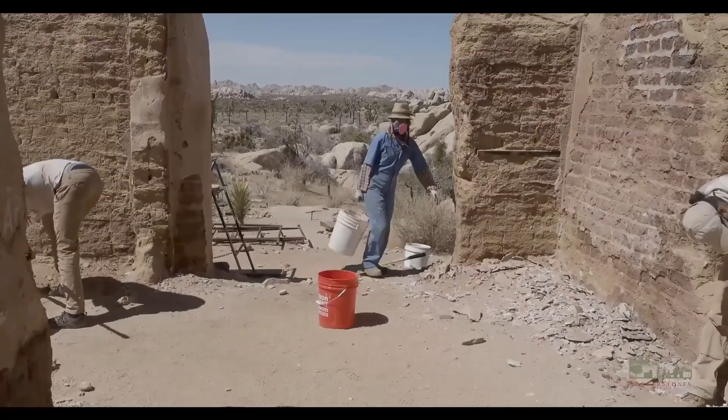So taking that failing lime plaster back down to the parking lot, which is a little over a quarter mile, and moving materials that we've been mixing up to the site. We did that by using a motorized wheelbarrow.

The earthen plaster is just clay, sand, straw, and water. We were mixing down in the parking lot using a concrete mixer, and because it's pretty rich clay, we added the clay first and let it hydrate in the mixer, then added the sand and straw.

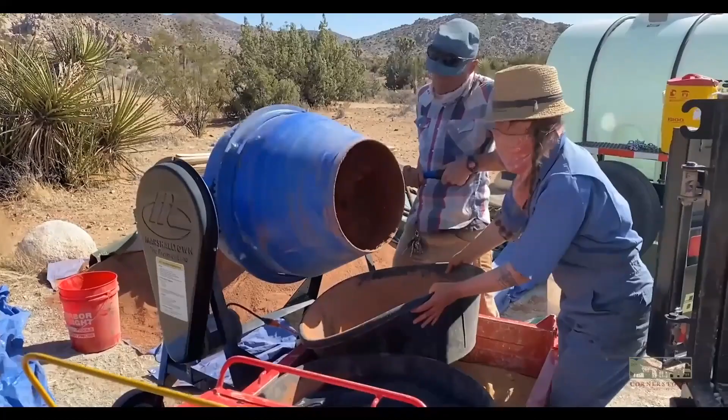The clay came from near Lake Elsinore, from a historic clay mine. We had to go further for the material because we couldn't mine in the park, and there aren't very many natural sources of clay around Joshua Tree.

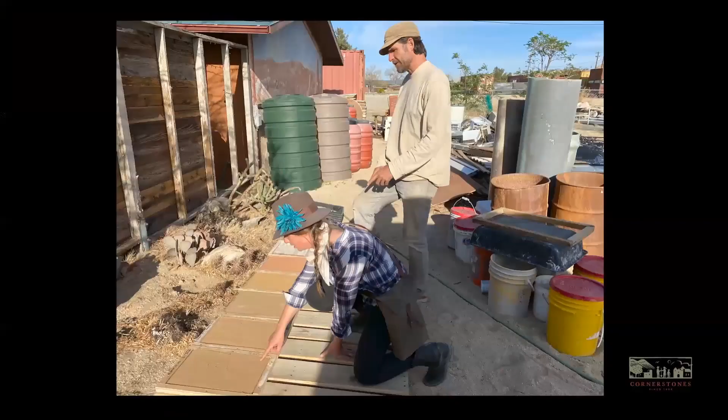Once we located the right materials, we made several test panels, some just on plywood and others on the structure itself, using different ratios of clay and sand. From these samples, we decided on a 2 to 5 mix—that's 2 clay to 5 sand.

Mixing and finding the right ratios was an important training moment for the park staff. They were able to see how different mixes reacted, how clay-rich mixes cracked, and how the sandier mixes didn't stick as well.

Hi, my name is Tia Abe. I live in Oakland, California, and I'm currently at Ryan Ranch in Joshua Tree, California.

Today we were learning about the general earthen plaster tools and how to get set up, working in this particular climate, which is very dry and quite windy, and how to take care of the site so we can be working efficiently, strategically, and together well.

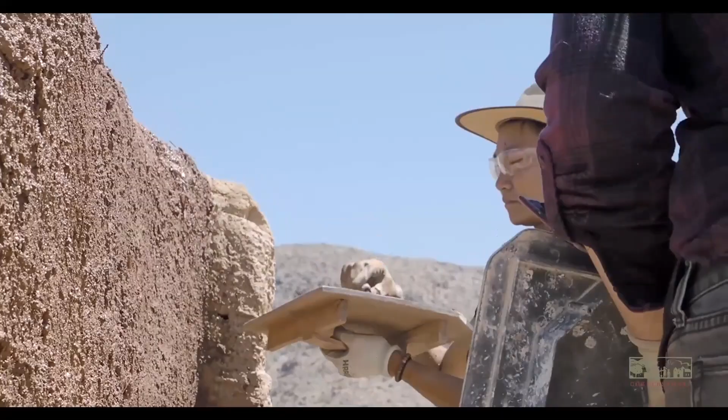And then we get into the plastering part, which is always the best part. We learned how to hurl the clay, sand, and straw mix at the walls.

Once we had moved all of our materials up to the site, we were able to begin earthen plastering. We did this by wetting down the walls and hurling the material onto the wall, either by throwing with your hands or with tools. We also used our hands to push the materials into the wall and wooden floats to level out the different surfaces.

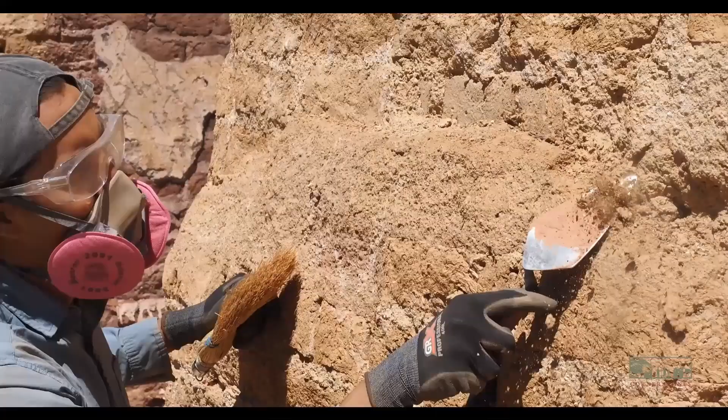After removing all of the lime plaster and thoroughly cleaning the walls, we started off with making minor adobe repairs. This was mostly so that water sheds away from the wall rather than getting caught on ledges and further damaging the interior of the walls. During this first workshop, we worked closely with exhibit specialist Matt Sanford.

He was able to learn how to mix, what to look for in the different ratios, and how to apply the earthen plaster to the walls.

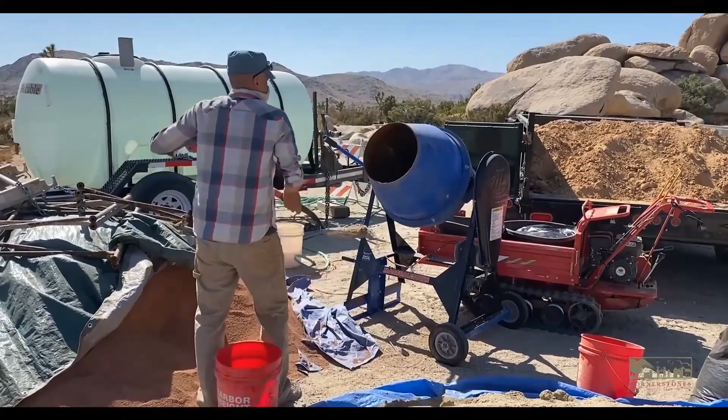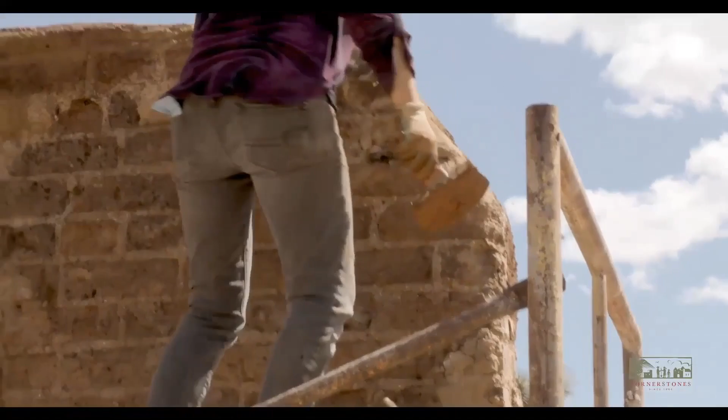The earthen plaster that we put on is really a sacrificial coat, meaning that it's there to protect the adobes beneath it, and we're expecting it to erode over time. We're going to be returning to the park to help maintain the earthen plaster and taking care, especially to monitor the parapets, or the tops of the walls, because those take the most damage from the rain and snow.

The earthen plaster was chosen for several reasons. One, it's easy for volunteers and untrained park staff to work with, but also in the future for graffiti remediation and patching, it's a lot easier than lime, which is alkaline and takes a little more skill.

Over the next few years, Cornerstones is going to work with the park to monitor and assess the walls. This will be done by site visits every 3 months or after any large rains, and just doing simple site inspections. The plan is for Cornerstones to return annually or when needed to replaster the walls. And when we do that, we're hoping to engage more and more local volunteers and build the volunteers into the project so that they have an investment and there's some accountability to look after this structure.

Cornerstones is also interested in setting up the park for when our agreement ends so that they have the training and the right tools and the right materials to continue this preservation effort even after our partnership.

Just as a final comment, we have local assistants with us there at the project. Nicholas Holmes, Nathan McConnell, and Kyle Hansen, who live in Joshua Tree, are about 30 minutes away, and so that's a very great local support. We had 11 volunteers working on this project, and so we really feel encouraged about the concept of having volunteers being available locally to continue this process out of kind of like a friends group arrangement. And so that's the goal of what we're headed for here at Joshua Tree with Ryan Ranch.